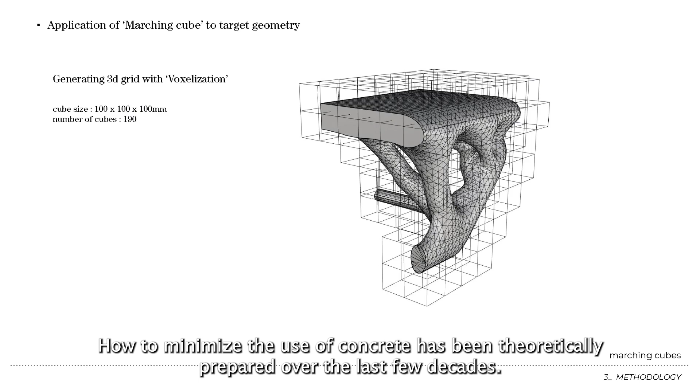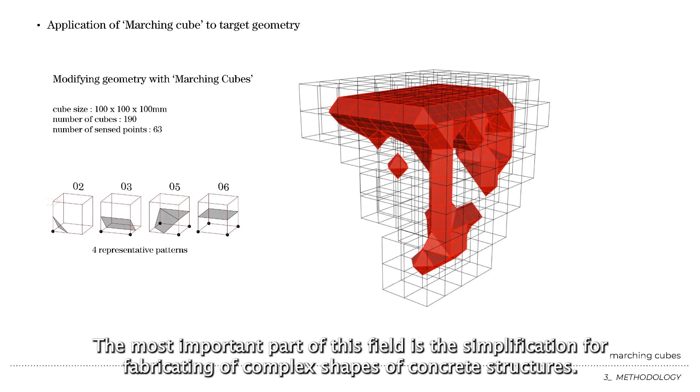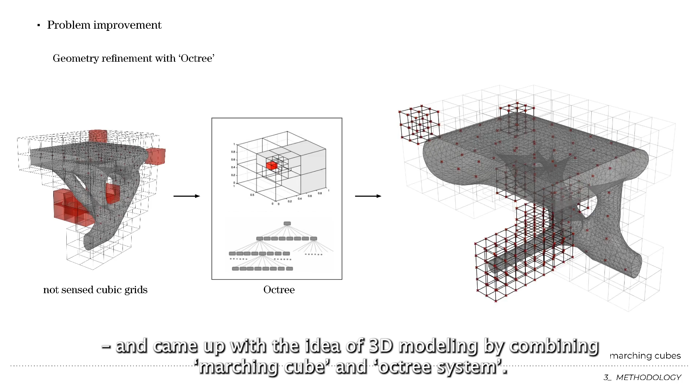In fact, how to minimize the use of concrete has been theoretically prepared over the last few decades. In other words, the most important part of this field is the simplification for fabrication of complex shape of concrete structures. So I researched it, making process of mesh geometry, and came up with the idea of 3D modeling by combining marching cube and octree system.

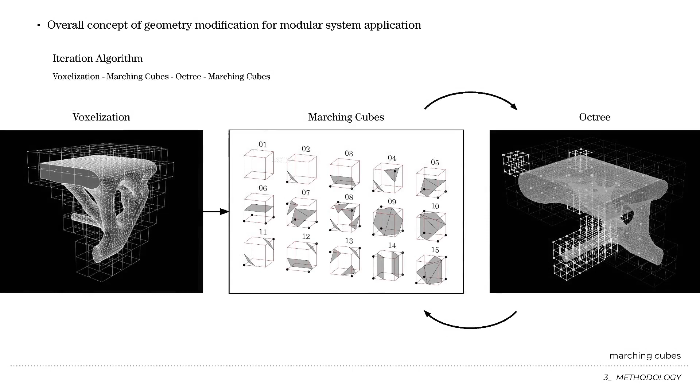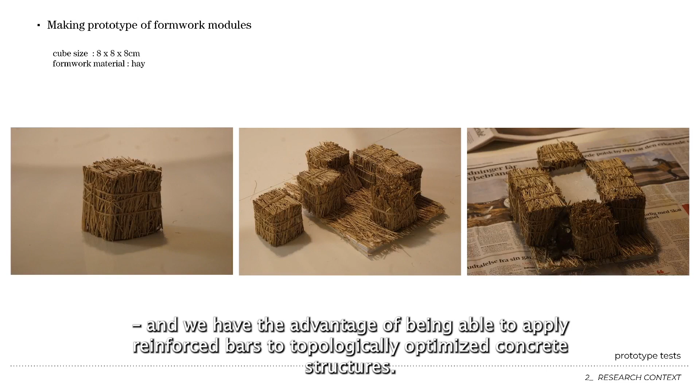Rather than a super dynamic curved structure, it is straight but manufacturable and sustainable. Besides, the straightening of structures leads to the ease of fabricating the formwork, and we have the advantage of being able to apply reinforced bars to topologically optimized concrete structures.

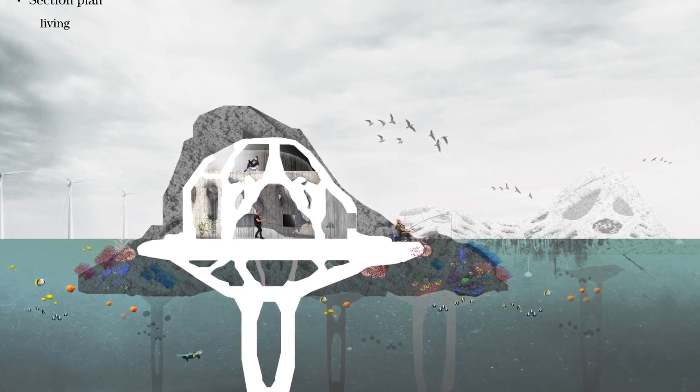There are more possibilities than I have found out so far, but at the same time, the difficulties of fabrication require a higher level of understanding of computation. So I'm still working on computational tools at this moment and would like to make a contribution to it at some point.

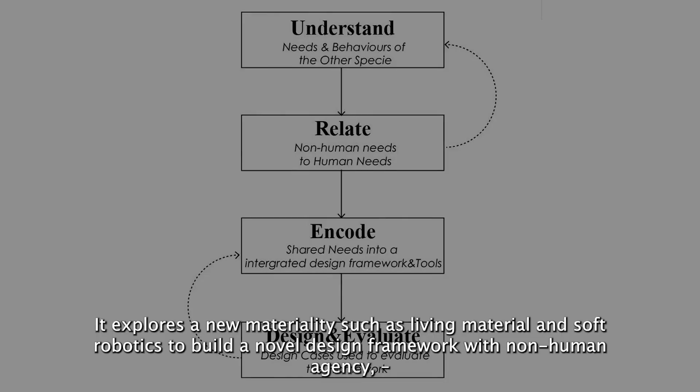Hi, I'm Youcheng Li. I'm originally from China and graduated from the Computation in Architecture program in KADK. And I'm really happy to share my project with you guys. So my project in short is a research-based project that explores a new materiality, such as living materials, soft robotics, to build a novel design framework with non-human agency involved, which in this case is a special bioluminescent algae.

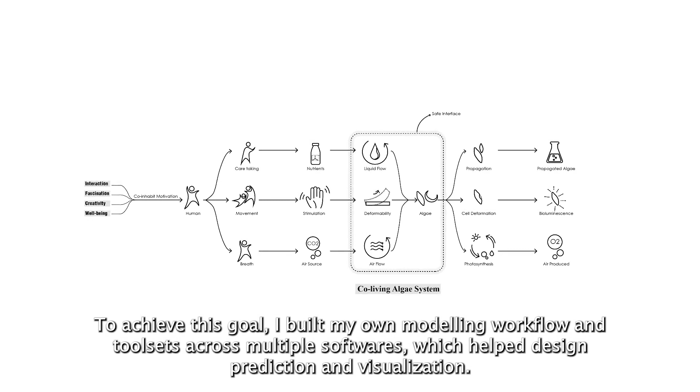And to achieve this goal, I built my own modeling workflow and tool sets across multiple software that help design prediction and visualization. In the end, by designing the co-living space, it tries to embed a reciprocal relationship with algae in our daily life and harvest secondary effects, such as aesthetic and emotional value.

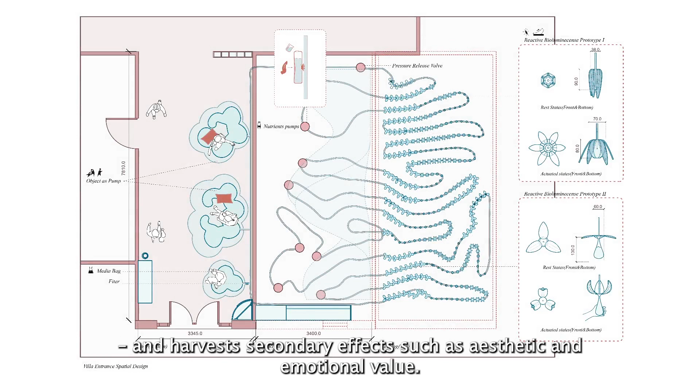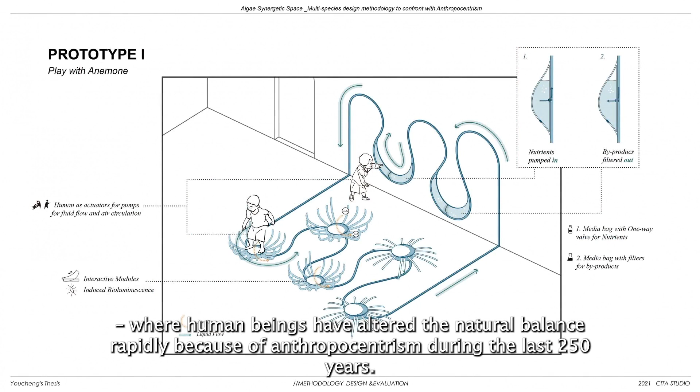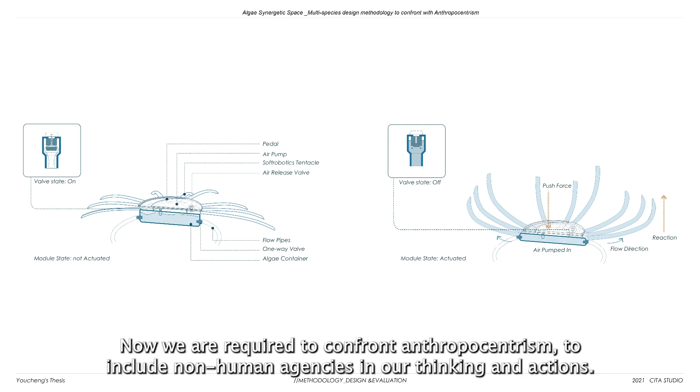And the context about this project is, we should notice that we are in the Anthropocene, where human beings have altered the nature balance rapidly because of anthropocentrism during the last 250 years, and now we are required to confront anthropocentrism to include non-human agencies in our thinking and actions. However, for us architects to take actions, we should realize that our current design tools are developed in an anthropocentric way, including Velux, Ladybug, LCA standards.

Their main focus is humans' needs like human comfort, life detection, and they are not designed to include non-human agencies or multi-species. It's not that we need to leave the human dimension, but to decentralize human beings as main characters and to consider a multi-species design strategy by developing a reciprocal relationship. And this opens an uncharted territory that forces us to reconsider our architecture design paradigm.

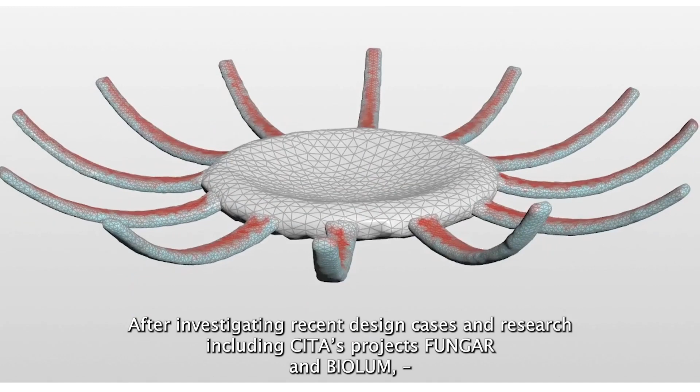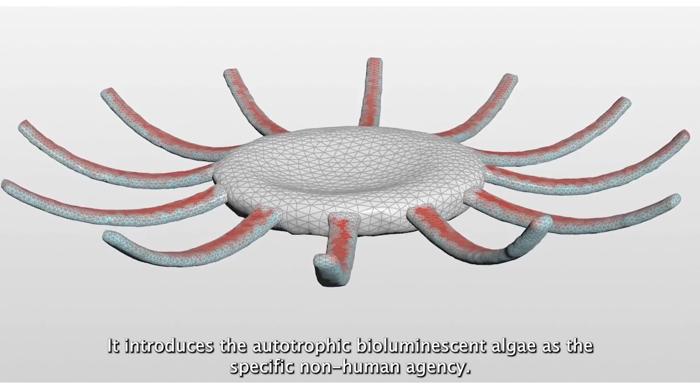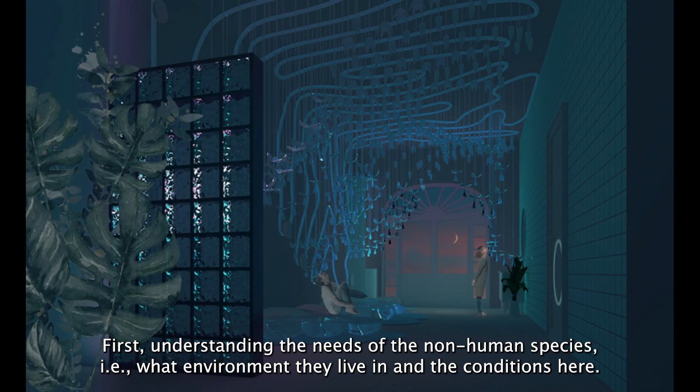And the project is after investigating the recent design cases and researches, including CITA's project, FUNGAR, and BIOLUM. This project works on the methodology for multi-species cohabitation design, and it introduced the autotrophic bioluminescent algae as a specific non-human agency. And the design approach is composed of 4 parts: understand, relate, encode, and evaluate. First, understanding the needs of the non-human species, what environment they live in and the conditions. Second, relating their needs with human needs to create the design motivation.

And third, encoding those needs and behaviors, both human and non-human, into a design framework as a guide to further design and thinking. The last one is to implement the framework in specific design cases to evaluate the functionality and the possibilities. The new technology in this project is it discusses how to implement soft robotics in design to create a safe interface for interaction as well as dynamic behaviors. Self-built simulation and visualization tools were created to help designers better understand the soft robotics and the bioluminescent behaviors and design according to the feedback.

Hi, I'm Dilara. I'm an architect and I graduated from CITA Studio in 2021. I'm interested in biomaterials, and my thesis project was about using mycelium as a new building material and designing the fibrous woven scaffolds. In my thesis research, I used woven scaffolds to grow mycelium to enrich biodiversity in Danish forests and strengthen the human-nature relationship. Mycelium has a very important role in reforestation of Danish forests.

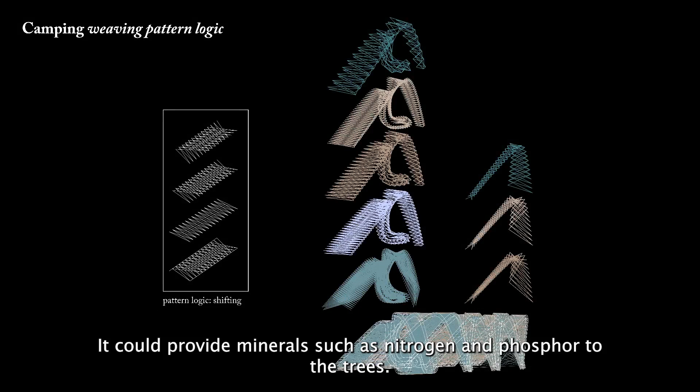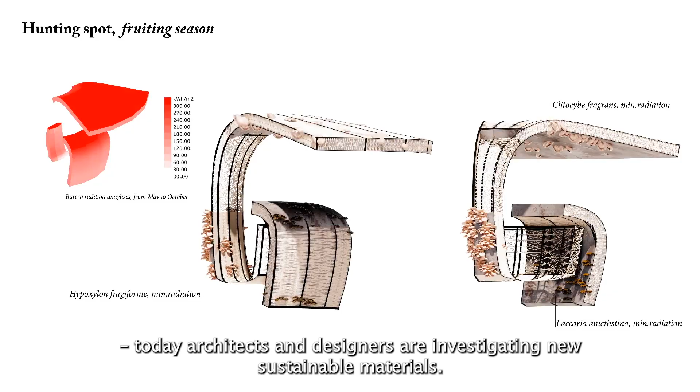By decomposing dead leaves and logs, it continues the carbon cycle and enriches the soil. It can be used to cleanse the soil from toxic and pollutant materials, and it could provide minerals such as nitrogen and phosphorus back to the trees. Because we are running out of world resources, today architects and designers are investigating new sustainable materials. Mycelium is one of them.

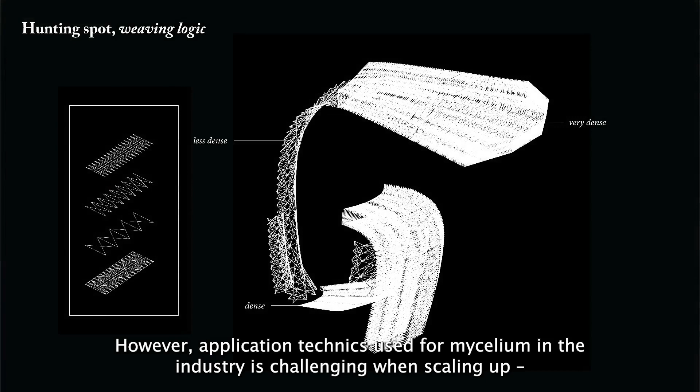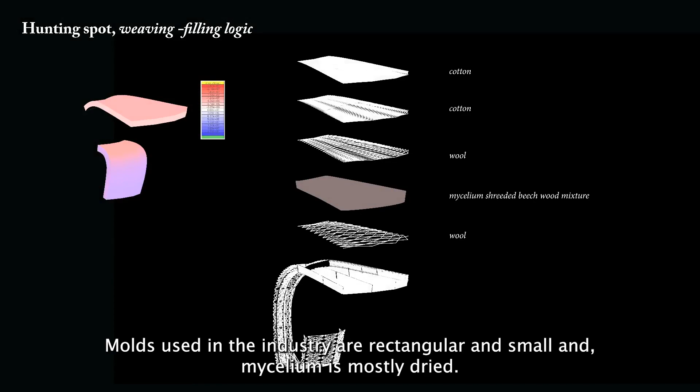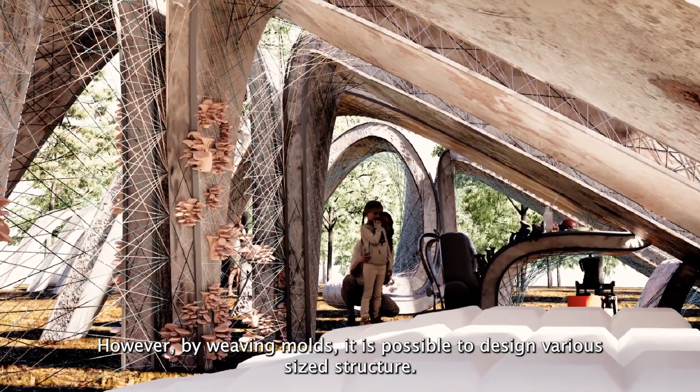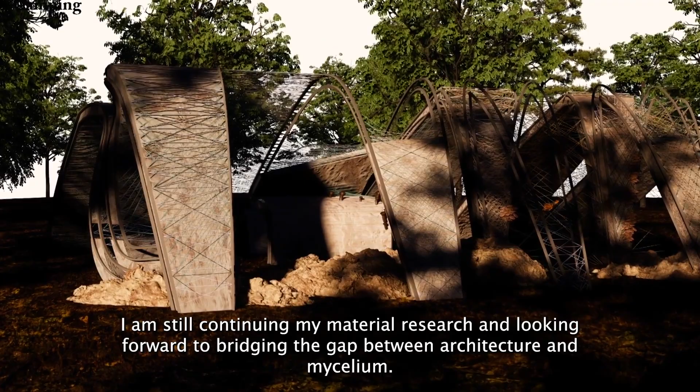However, the application techniques used for mycelium in the architecture industry are challenging when scaling up, and current sterilization protocols used in labs are not suitable for non-sterile environment production. Molds used in the industry are rectangular and small, and mycelium is mostly dried. However, by weaving molds, it is possible to design various size structures. Using this technique in reforestation will be better for both humans and nature. I am still continuing my material research, and I'm looking forward to bridging the gap between architecture and mycelium.